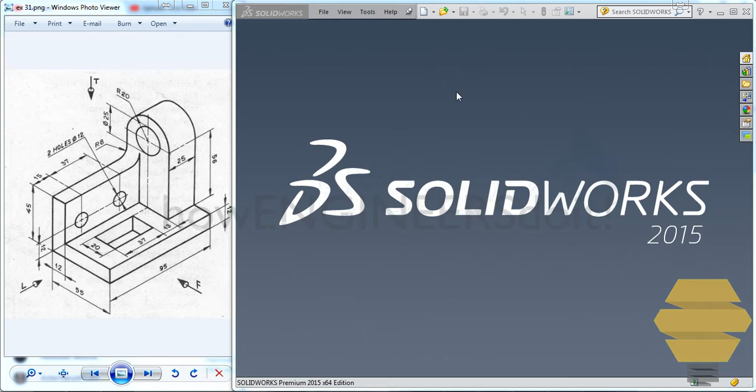In this video, we'll work on exercise number 31. To start off, let's go to File, New, select the new part template, and we have the workspace open. Let's go to the sketch as usual and start the sketch here.

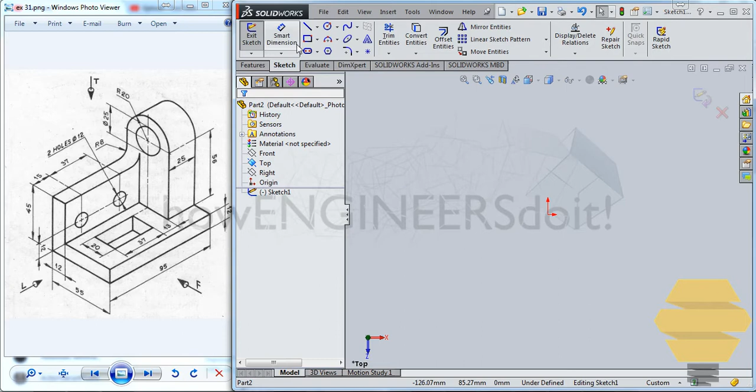In this case, I would prefer to do the sketch on the top plane. Let's start doing the sketch - at the center, a rectangle, and I'll dimension this 95 by 55. So we have the rectangle here.

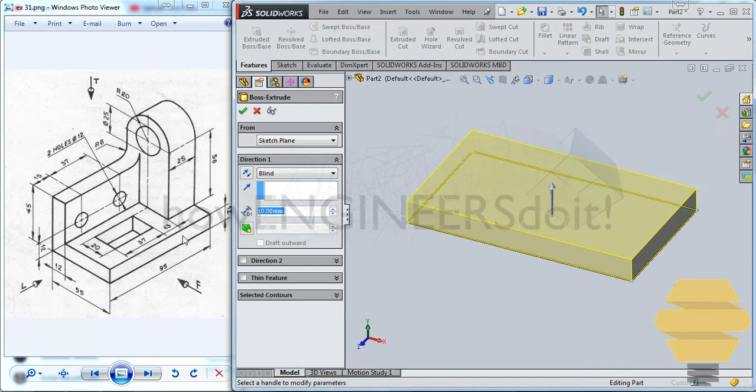Exit the sketch and then go for extrude boss and base. You can give a height of 12.

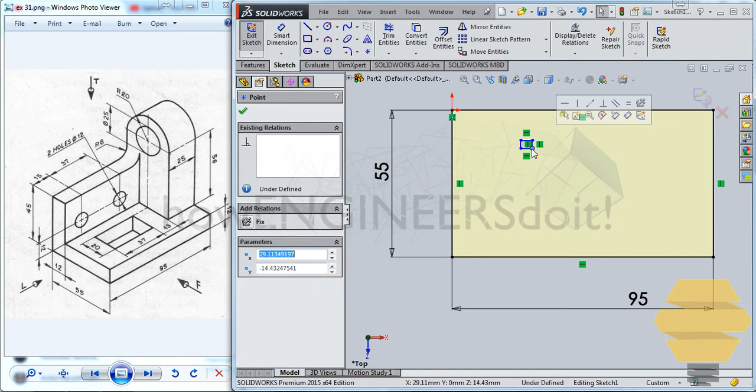So we have this base here, so you can make this rectangular hole, or go back to the sketch, press Ctrl 8, and draw that rectangle there, and dimension that as well. So that's 37 by 20, and that's resting at 13 plus 25 from here.

And at a length of how much? So we have a line which is projected from here, and that line is at the center, right? So the radius of the circle is 20, so this will be 20.

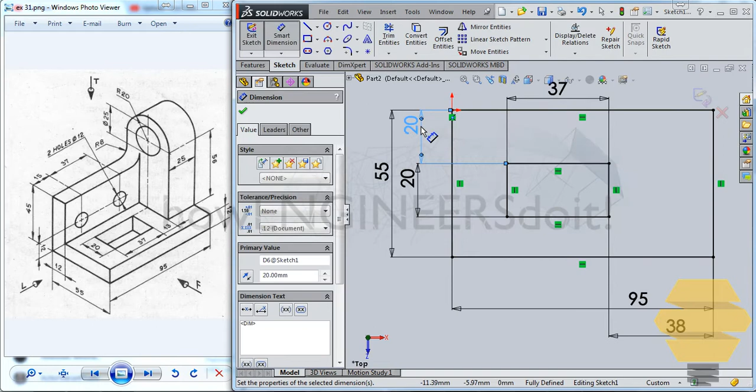Alright, now it's fully constrained. Exit the sketch and rotate around, and you'll see that portion is constrained. Now we can do this particular portion here. So 55, we've taken 55, so this 12 mm is also considered there.

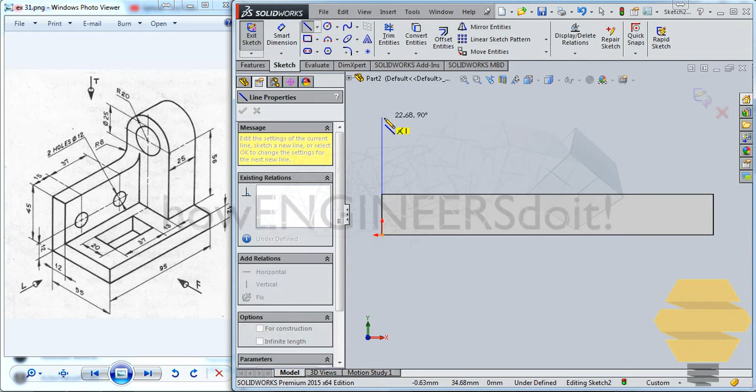So you can select this face over here, do the sketch, and press Ctrl 8 so you see from the other side, and we can start doing the sketch here. You can draw a line here, and let me just do the sketch here.

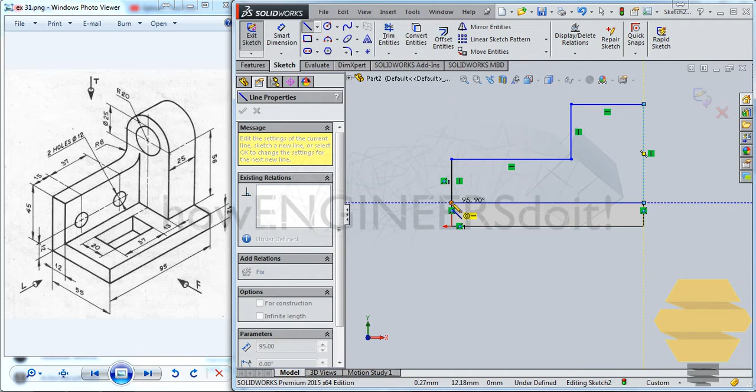Let's give the dimension of whatever we know for sure. So this will be, this is 12, so 45 minus 12, right? And this thickness is 25. And this height will be 56 plus 20.

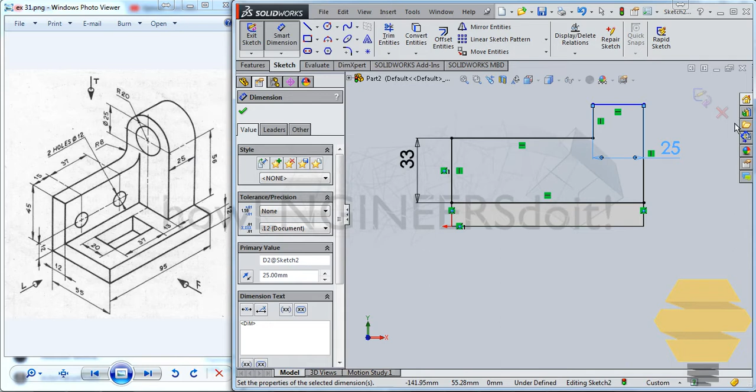So it looks like it's fully constrained. Now we have to give a radius of 8 over here, right? So you select this point here and go for fillet, give 8, and we have that portion done there. Now as we have this fully constrained, you can exit the sketch here.

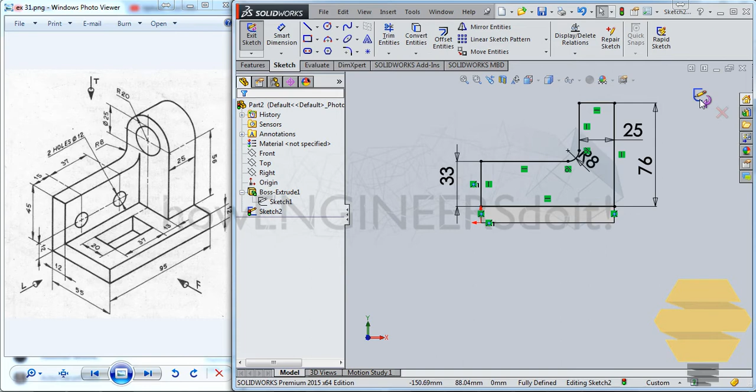Before you exit the sketch, there is a problem, I believe. Okay, let's exit the sketch.

Control middle mouse button to pan. So what I will do now is an extrude here in the reverse direction, and I'll give this thickness 12, right? Now this is 12, I believe. It's 12.

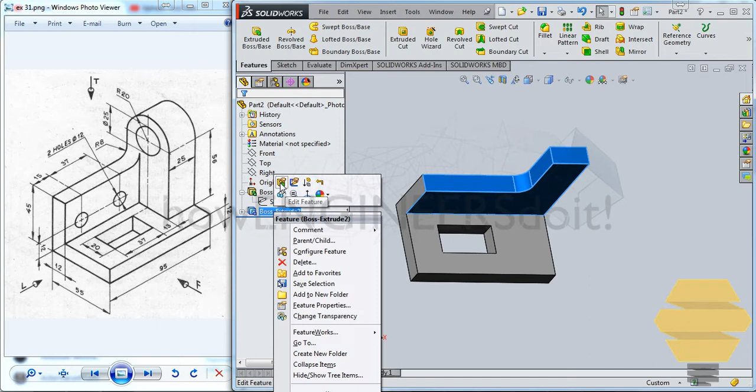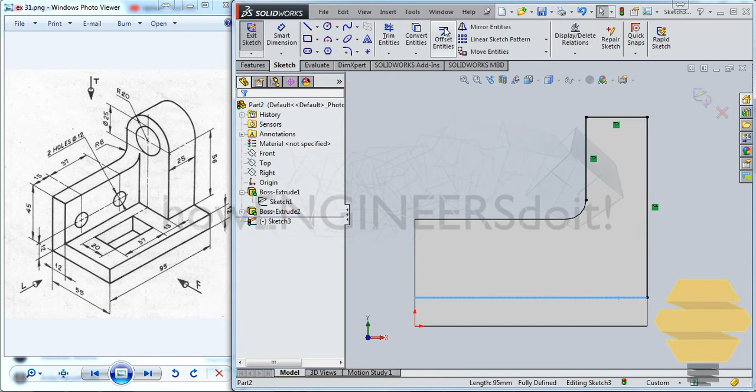Now we have this portion here. Now I'll again take this face here and go for the sketch, and this time I'll select this and this, go for convert entities, and also select this. Now I'll go for extend entities, extend this, go for trim, and just trim this portion, so we have this rectangle there.

Now exit the sketch once again, and this time go for extrude boss and base, extruding it from here to here. So what's the distance? As we know, the overall is 55 and the radius of the circle is 20, so this will be 40. 55 minus 40 will be 15.

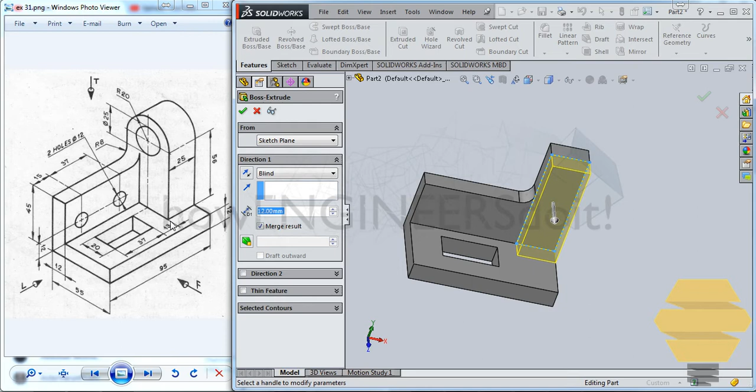So basically, this is what we have to give, right? So 55, this is 12, and you just give 55 minus 12 minus 15. Double enter and you have the portion there.

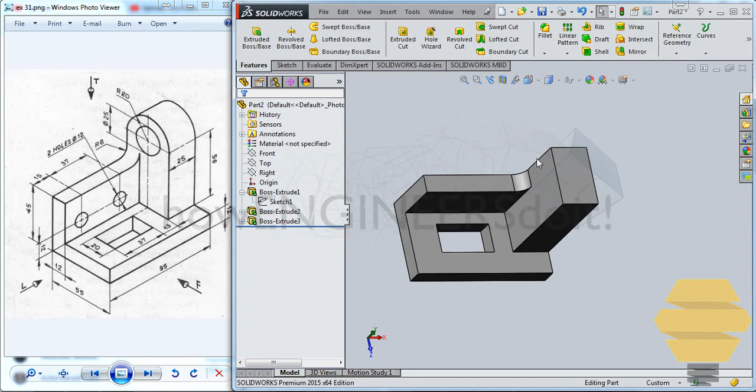Now you can select this edge and this edge here. I'll go for fillet, radius 20, double enter, and you have that done there.

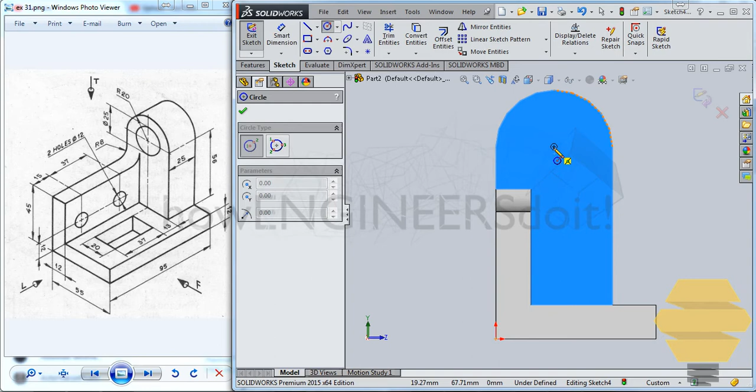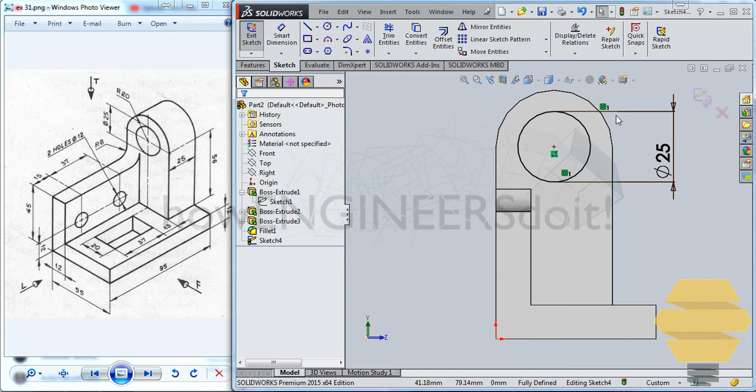And now you can select this face here, go for the sketch, and create a circle at the center here, and define the diameter of that circle, diameter 25. The circle will already be constrained with concentric, but it's always good to be on the safer side, so you just give a constraint over there. Now you can see the circle is in black, so it's fully constrained.

Exit the sketch now and go for extruded cut. Up to next will be good, tick mark, and we have that portion done as well.

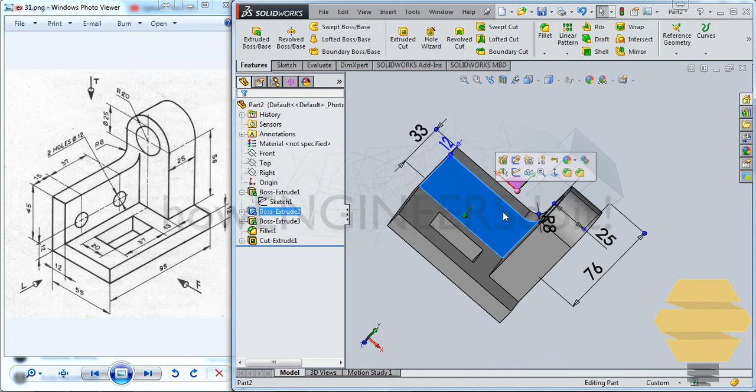Now we have to do 2 holes over here, so select that face and go for the sketch. Now you can simply create 2 circles and start dimensioning both of the circles. That'll be diameter 12, and diameter 12 here, simply dimension them.

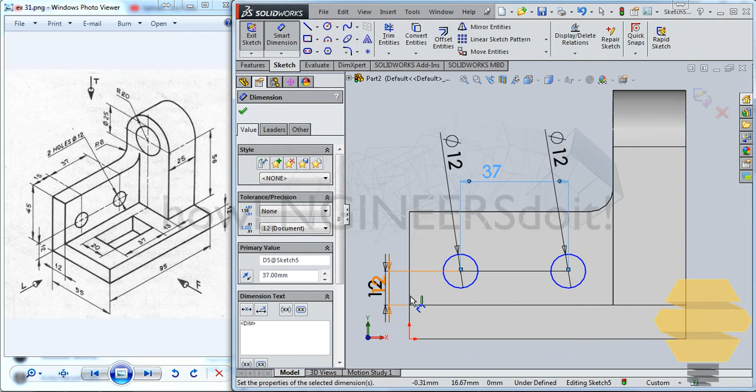That should be 12 from this face, right? 12. So you give the same thing here. Now this circle and this circle are 37 mm apart, and this circle is at a distance of 15.

Now we have the circle placed. Exit the sketch now and go for extruded cut. Up to next will be good. Tick mark, and we have that constraint, right?

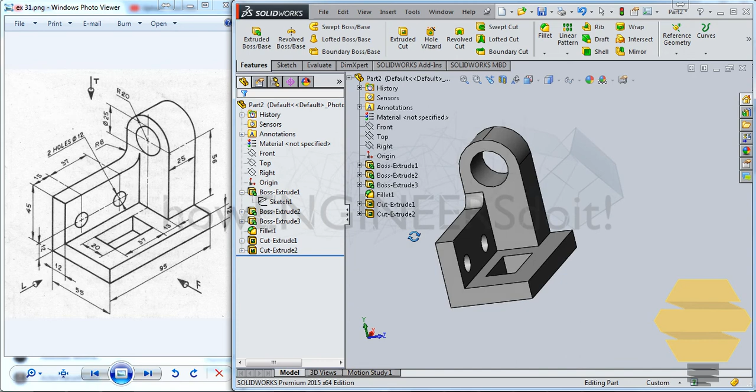So that's all about our exercise number 31. I hope you enjoyed it, and if you have any doubts, you can comment below the video.